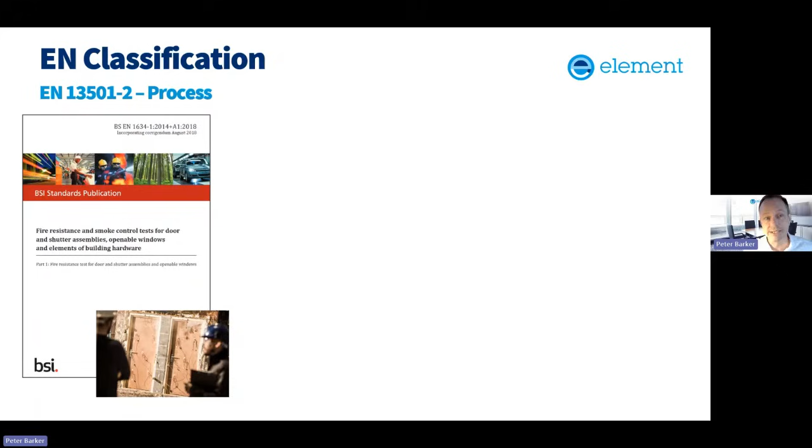Okay, so on with the EN classification process. In a nutshell, it's actually relatively straightforward. You have your test standards, the standards against which you evaluate the performance of the product in test conditions. You then move forward and take that test evidence and extend the scope of it - that's done under EXAP standards or DIAP rules within test standards, but it's the process of extending the scope. And then you communicate the performance of the product, depending on the performance characteristics you want to communicate based on the test evidence, by following the requirements of the relevant classification standard. For fire-resisting doors, that's within EN 13501 Part 2.

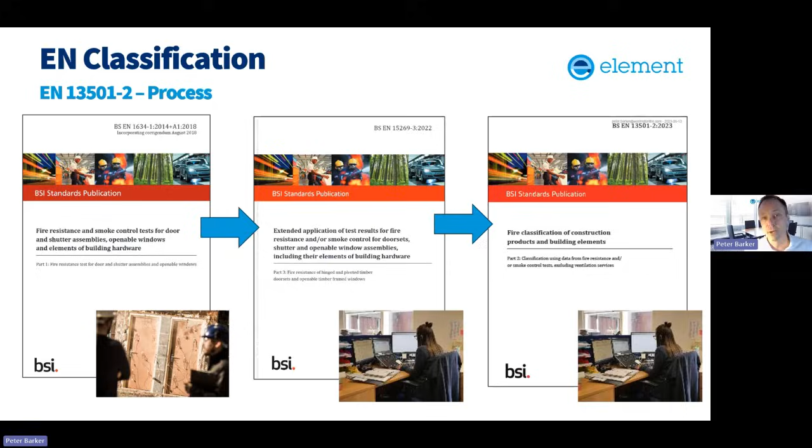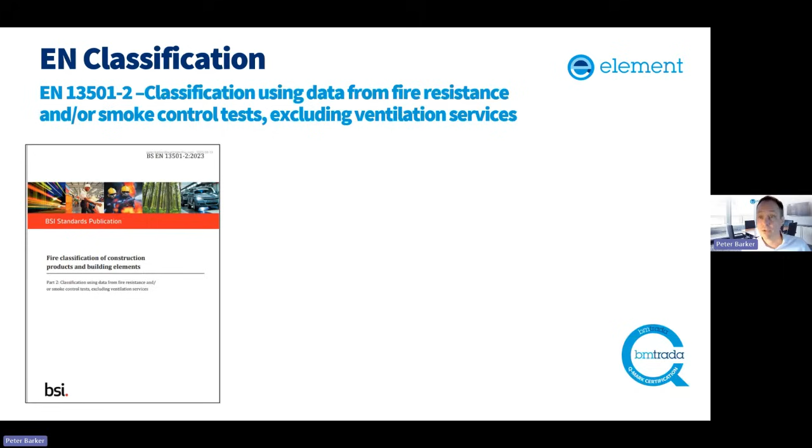So when we look at the classification standard itself, the classification standard relevant to doorsets is 13501-2. Within the standard, it explains what is meant by integrity as it relates to the classification letter, which happens to be E for integrity, and breaks down what that means. But it also goes through the other performance characteristics relevant to the products covered by that 13501-2 standard relating to fire-resistant construction products: E for integrity, I for insulation, W for radiation, R for load bearing, and so on and so forth.

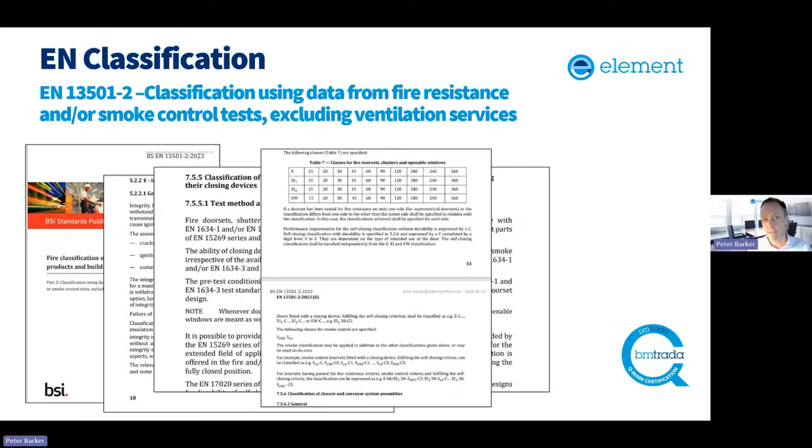Within there as well, there's a number of sections that relate to different types of products, and the one that relates to doorsets, shutter assemblies and openable windows is section 7.5.5, and that tells you the test methods, the field of application rules that you need to use when drawing together the evidence that would allow you to apply a classification to that particular construction product. It also gives information on how to present that classification in terms of the string of letters and numbers and what they mean, and we can explore that a little bit later.

And then in the annex, it gives you a format, a template as to what a classification report should contain: information on the sponsor, who prepared it, a description of the product in sufficient detail that someone can see that the classification report relates to the product in front of them, and a summary of the evidence that's been used to pull that classification report together.

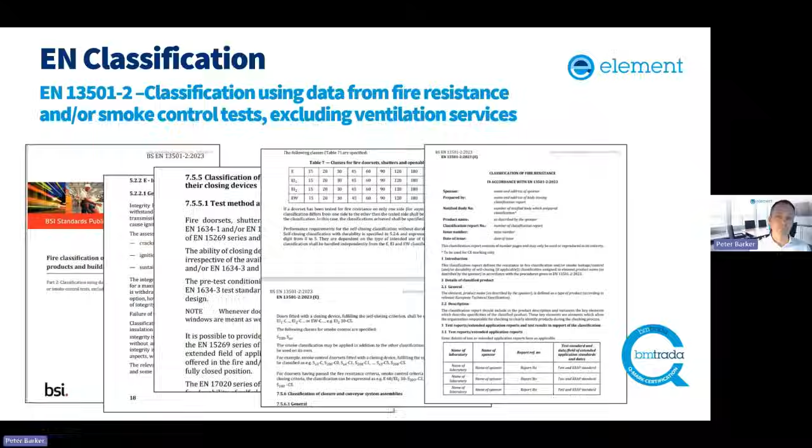So, starting at the beginning of our journey in terms of how do we go about generating a classification, it is about starting with a product family.

This is a definition from 15269-1, and this breaks things down for a product family into three parts. Reading out the definition: a product family is a group of products within defined limits of variability of the product parameters, derived from at least one representative product that has been successfully tested.

And you can think of this as the design. The next part, the limits of variability, are defined by the manufacturer or a technical specification and are determined by the allowable changes in composition, materials and construction given by the applicable EXAP rules or relevant supporting tests. This is effectively the scope of the product family.

And then finally, for all product family members, the fire resistance and/or smoke control performance has to be equal to or better than the lowest common classification that the manufacturer wishes to declare, and this is the performance. So conceptually, think of this definition of product family as the wish list.

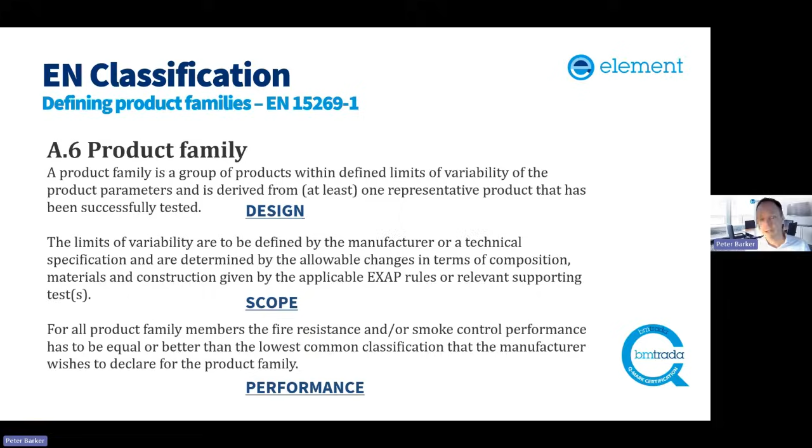I've taken the time to break this down further and relate it to something you'll certainly be familiar with: the current products you manufacture against the assessments that support those scopes within the national schemes.

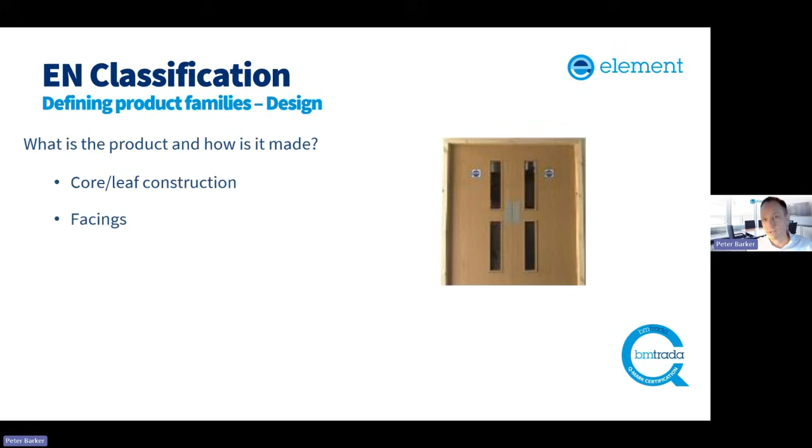So if we start with design, when looking at product family, the first question you want to be asking is, well, what is the product and how is it made? Breaking it down: what is the core? What is the leaf construction? What are the leaves made of? What facings do you apply to the door?

What are the glue lines? What apertures do you want in the door? Do they come with aperture liners? How do you go about glazing the door? What door frame? Typically, how do you construct your door frame? What materials and so on? And the seals that you'll need to fit to the door based on the performance characteristics you want to claim.

Now, I appreciate when you look at this you think, well that's all well and good, but I want alternative facings, alternative glue lines, different numbers of apertures and shapes and door frames and seals and all the rest of it. That's fine, but that part's in the scope.

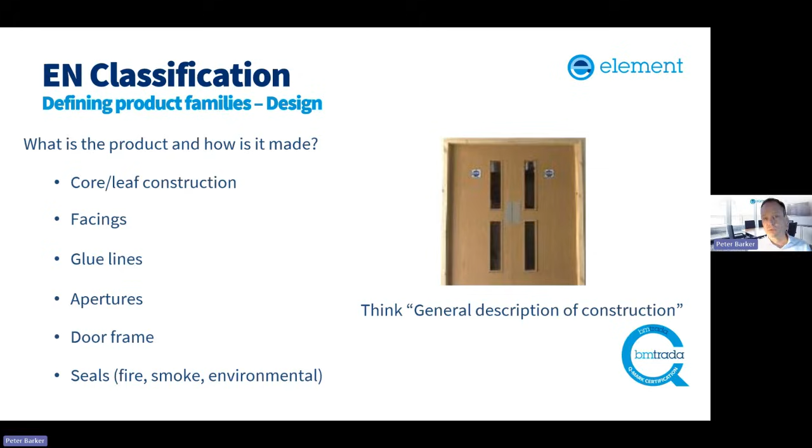Initially, you want to be thinking of this as your general description of construction. That's a section within the field of applications you'll be familiar with today. It's the description of the product in terms of what you construct, and then we can start digging into the next part, which is the scope of the options you want to provide. So that's the first part - what is the product, what is the design of that product?

Then we look at the scope. This is where you start looking at the design options you make. So now you're looking at things like dimensions - not just smaller, bigger, but there will also be things in terms of size alteration.

So do you need to provide for adjustment to lippings, for example, for on-site fitting? Or does the design of the door have internal framework to adjust the size of the door as part of the manufacturing process? You're looking to have the option for reducing that framework or removing it altogether.

Configurations - singles, doubles, but also things like over and side panels, fan lights, side lights, or solid infill panels. Also what hardware you would like to fit to the door - options for hinges, lock sets, closers, access hardware, air transfer grills, whatever hardware you want to provide for that particular product design.

Glass as well - type, number of apertures, alternatives in terms of glazing systems and shapes and so on. Facings and finishes, decorative finishes, and other faces you might want to offer to the door, and perhaps alternative seals. And there will be other things missing off this list where there'll be additional scope requirements as well.

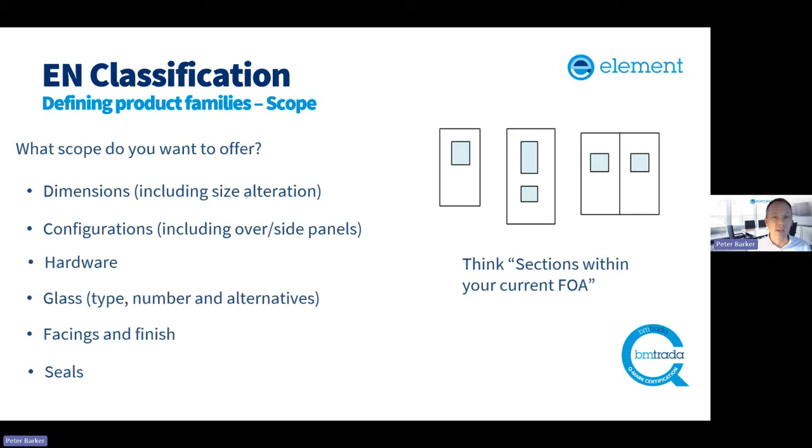Now, the best way of thinking of this part - all of you will be familiar with the field of applications - think of the sections within your current field of application. Indeed, that's how we've laid out our XAPs. It should feel familiar. So if you're looking at those different sections that currently handle the glass, the hardware, the facings, the finishes, and the seals, you can begin to understand what that scope is.

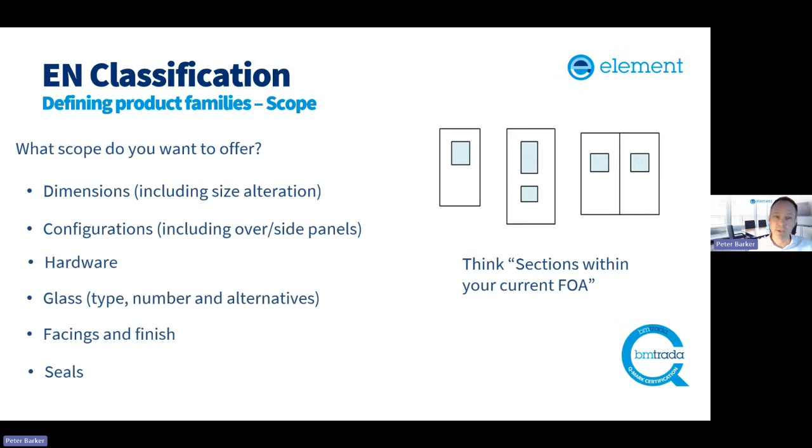And clearly, the more scope you want to offer, the bigger the test program will be. But that's the same situation as now. There are some things we need to think about within the XAP framework to avoid, to make sure an efficient amount of testing is conducted, and I'll explain that shortly. So scope, really, you've got an existing framework - you can almost tick things off if you look at the sections within your current field of application.

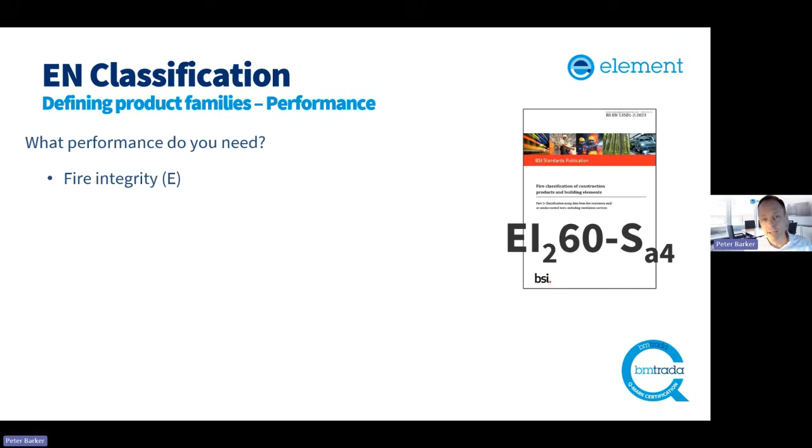Then we're looking at performance, and this is a very important part of defining the product family. This is the performance that you need. So we're looking at: do you need integrity? Do you need thermal insulation as well, or insulation performance? Do you need smoke control - we've got SA3 or SA4. Do you need radiation control? Do you need self-closing, and do you need durability of self-closing?

Now, in the vast majority of cases, in terms of the performance characteristics and classifications we look for in the guidance to the building regulations, you're looking at fire and smoke. Sometimes there are requirements for insulation, but typically most are called up as integrity and smoke control. But the classification system does cover the other characteristics that are on the screen, and we have brought them inside the third-party certification schemes for EN.

So in this case, you've got to think end-use requirements. Now why is this important? You could think, well, I'll go for full integrity, insulation and smoke control, but unless you need to provide certain designs with full insulation, it's worth thinking, because that is going to start dictating the product family in terms of maintaining that insulation performance. For example, the glass will be of a particular specification to provide that full insulation you may require. So it's worth thinking about those end-use requirements and what characteristics you definitely need from a particular range of products, rather than thinking, well, if I set out for everything, then I can trim it back accordingly - because you may well end up with a specification of door that always requires fully insulated glass when it comes to glazed apertures.

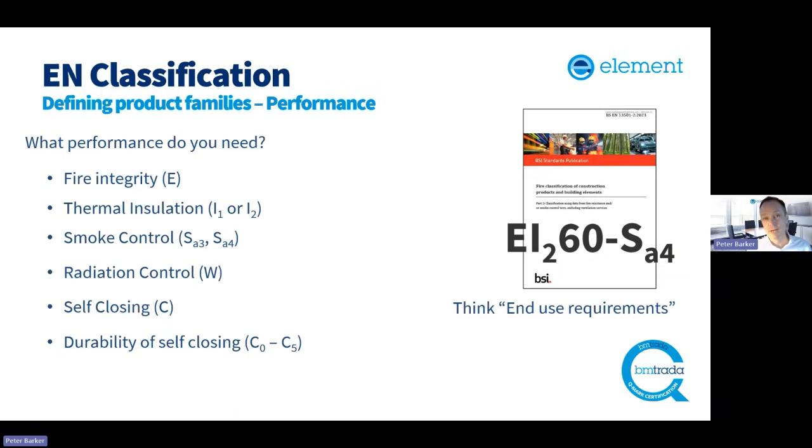So all of the above, as I've said, have been included in the new QMark schemes. Thinking about that performance and how that's going to shape your product family going forwards is very important.

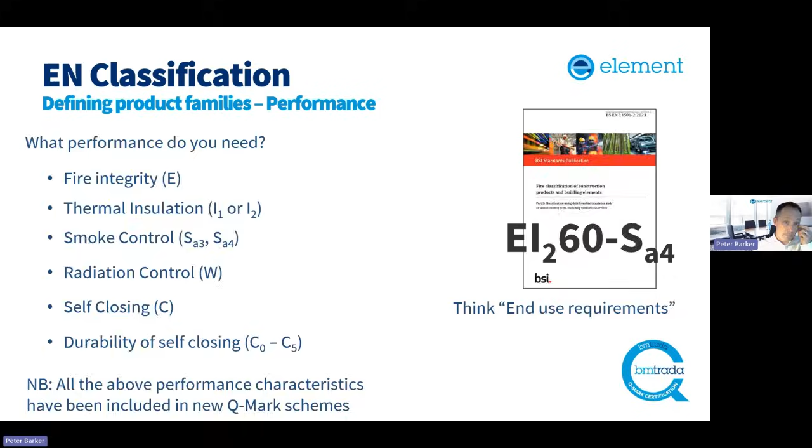So if we get under that and have a look at the test program considerations, we have EN 15725, and that's the header standard for XAPs. That doesn't tell you specific rules on XAPs. This is the governing document that tells you what goes into an XAP, what the approach to XAP is, and it also includes a section now on how to prepare XAP standards.

So there are two approaches within EN 15725. All start with the definition of the product family in the way that I've described - so design, scope of that design, and what is that performance you're setting out to achieve. Just to reiterate on that performance piece, a number of characteristics under our national approach - for example, with insulation, it's been possible to get to that insulation performance by fitting a different piece of glass that can perform, and marrying it with what you know of the doorset performance also being an insulating core.

Likewise with smoke, it's been possible to cascade previously tested smoke seals that have been tested to the relevant standard and claim smoke performance. It's not to say there's anything wrong with that system, but the way the European classification system works, it looks at all of these characteristics from a doorset-led perspective. So it's not a case of just backfilling things based on evidence generated on other designs. It looks at the design, the performance characteristics you want from that design, and does it from a doorset-led approach for those characteristics for that design.

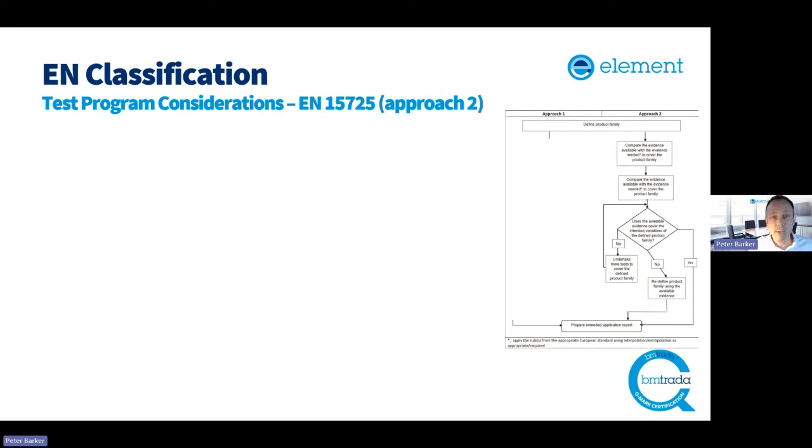Approach 2, very similar, but this is recognizing that you still need a product family, but you may already have evidence. That evidence would be submitted to the laboratory that's going to prepare the XAP and classification report for the product family that's being requested. Effectively, you're going straight in to check whether the results and that evidence do in fact cover the manufacturer's product family. If it doesn't, in a similar way to what we described before, you either redefine the product family or you undertake further tests to fill those gaps that you need.

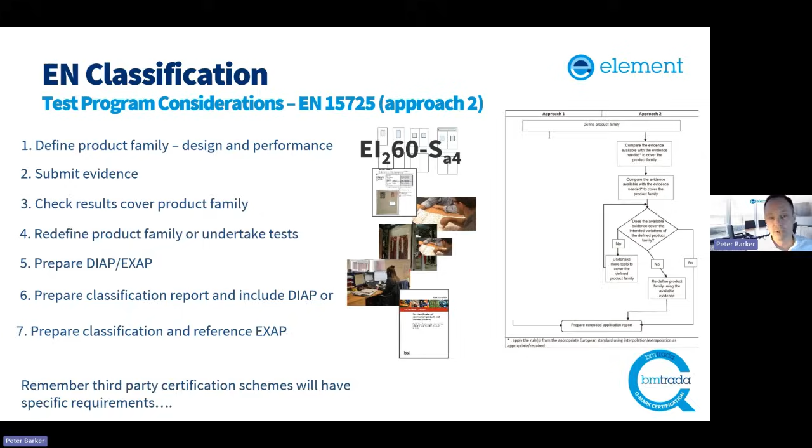Ultimately, when you're happy with the scope redefined or you filled the gap with additional testing, you prepare the scope documents and you prepare the classification report that includes the direct application, or you prepare a classification report that refers to the separate XAP that's been prepared. And again, no different, remember that third-party certification schemes will have specific requirements, and we'll talk to that later.

So I've done a slightly different arrangement for those of you that have seen me explain the concept of product families and so on before. Others I know won't have, but I thought I'd use these slides against existing XAP rules to show you the importance of getting that scope right against the performance characteristics that you want to provide.

Okay, so we have a fairly basic looking double door here. We have a product reference for it, and it's the ENDoor. And in this instance, the manufacturer, it's timber based. They want integrity and insulation for 60 minutes. And so we know that we're looking at the extended application rules within EN 15269 Part 3.

The design, it's a particle board design, could be anything, just pick that. It's lipped, it's got glazed aperture liners in it. It's glazed, it's in a softwood door frame, unlikely for 60 minutes to be fair. But it's got a timber door frame, 2mm timber veneer finish, and it has fire seals. It has intumescent seals around the perimeter. Obviously there will be hardware in there and other features, but in its basic design, its general description is there.

So what I've done is look at a very basic set of requirements. I know most scopes will run wider than this, but if we just start with dimensions, typically most people want the option of making things smaller than what was tested. And when we look at the EXAP rules within 15269-3, it points at the DIAP rules in EN 1634-1, that rule in the EXAP standards A31, and it permits you to make it smaller. Fine, tick. So that's the first scope requirement ticked off, and we can do that.

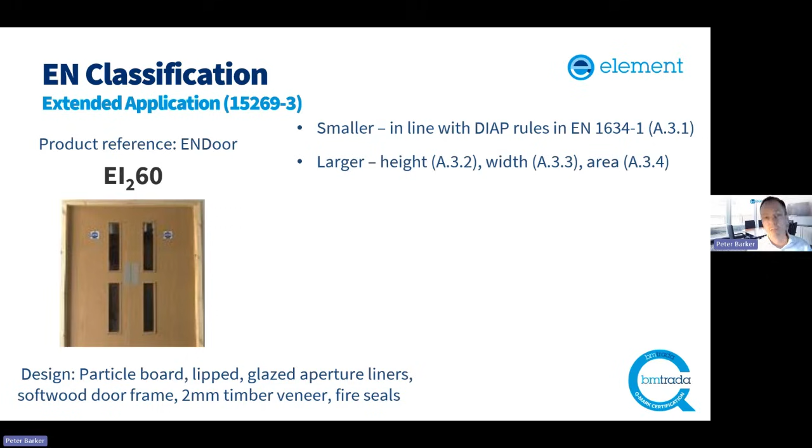So we know, based on testing this design, we've got the scope for making things smaller and larger. There was also a request for adding veneers and removing tested veneers, and actually that is possible. There is a set of rules for that, A51 and A52.

A request also for lipping thickness increase and decrease to provide different options for lipping thickness, but also quite often there's a requirement for some scope for site fitting allowance to just allow for some lipping adjustment. That is possible in fire, but there are limitations to the increase and decrease of lipping thickness, and that is given in A515. And an option to remove apertures.

Having a door without any glazing in it, but also to reduce the number of apertures from 2 per leaf to 1 per leaf, or 2 in one leaf and none in the other. And there's a rule for that as well.

Now, there are conditions around each of these rules. For example, removing apertures would need the glass tested to be less than a certain percentage of the leaf size, because of the stability that glass can offer to timber-based leaves. The same with the reduction in the number of apertures. But given what we've got in front of us, it's possible.

So straight away, with a request with some information on the design, the goal for performance characteristics, and some requests for scope, we can work our way through the EXAP, and with one test we can get these options covered off, pending a successful test.

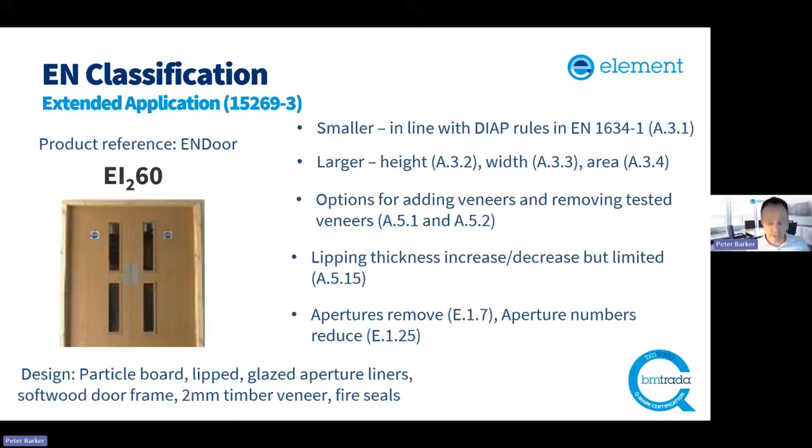When things start getting interesting, and this is why you need to understand from the off if you're looking at fire only or fire and smoke, same design. This time, though, we're looking for integrity, insulation, and smoke control.

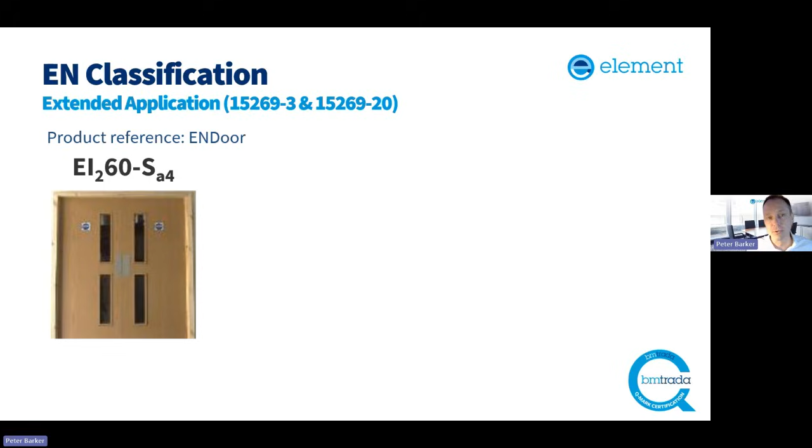The SA4 relates to ambient smoke control, where the door has been tested without a tape at the bottom of the door. So it has some form of seal at the bottom of the door that allows it to provide the required level of ambient smoke control.

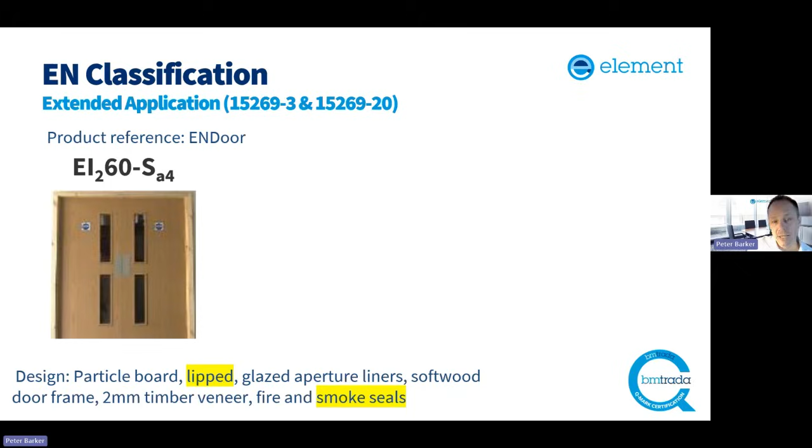So the design, there is the same design, but obviously now we are looking that there would be some smoke seals included, and there'll be a reason. I'll explain the reason for highlighting some bits.

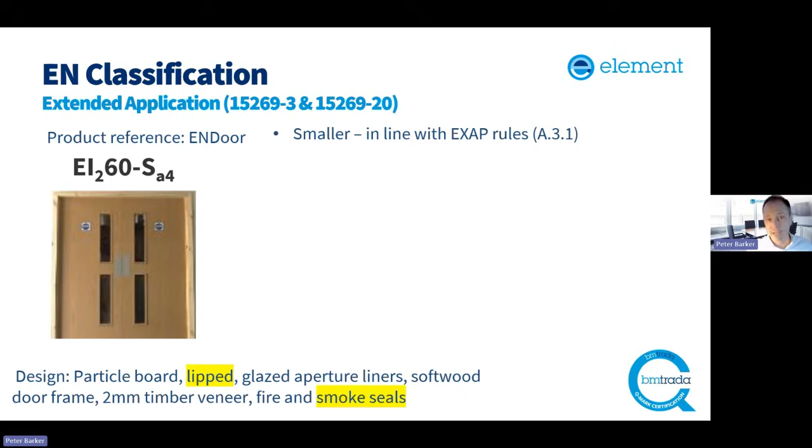So same request, we want to make it smaller. It's the fire and smoke door. We still want to make it smaller. Now, looking in the EXAP rules within 15269-20, you can make it smaller, and that aligns with the rules that allow you to make it smaller according to Part 3 for fire.

So smaller, ticked. Starts getting interesting with larger now, because under 15269-20 you can only make a leaf larger if you've tested the doorset at 2500mm high, and area 6 meters squared in the case of a double door. There are specific rules around height, width, and area, but now we have a conflict between the fire scope and the smoke scope.

So if you were to test the fire door at 2200 high, and test the same design smoke door at 2200 high, you would be limited at 2200 high or smaller. So straight away, if you're not balancing both XAP standards against that performance requirement, you may end up with something that limits a particular design scope option.

Options for adding veneers and removing tested veneers is possible within 15269-20, as it is in Part 3. And there is also the potential for adjusting lipping thickness, but the way in which the rule is handled, and the reason why you have different ways in which the rules are handled, is because you're looking for different characteristics.

It's limited to the sealing system on the smoke door, whereas it's a limited amount by plus or minus 25% of the tested thickness for fire. So again, if you're not careful and make sure that you've got your required lipping thicknesses tested for fire, you can end up testing something that doesn't give you the lipping range that you actually want when it comes to fire and smoke.

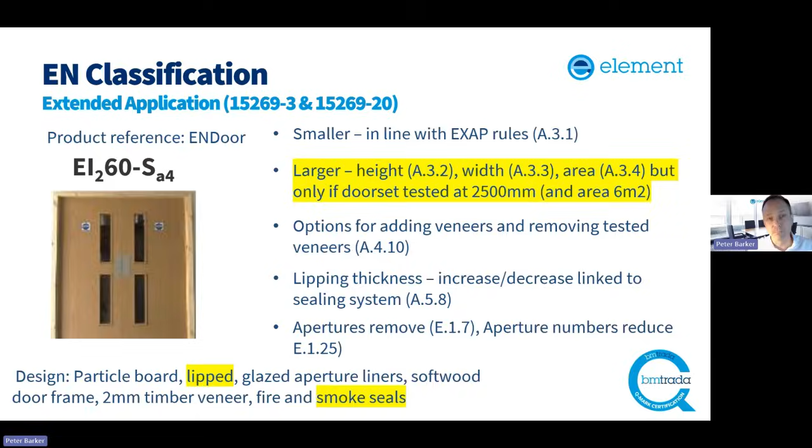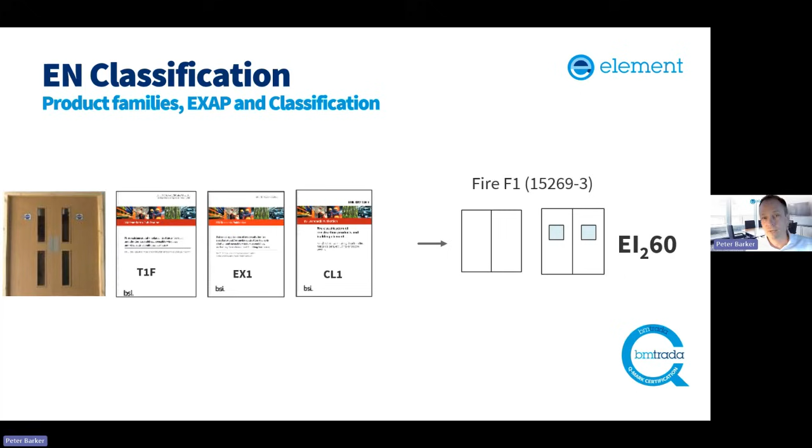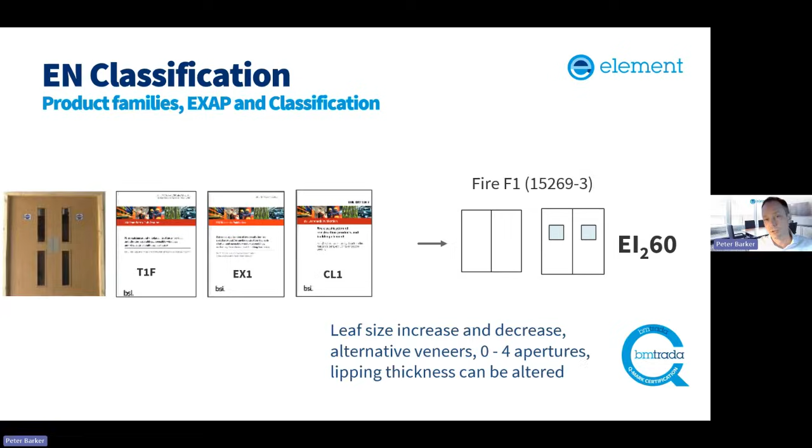We have a door, we have a fire test, we have the first EXAP classification report, and you get the classification that you want. You've got your family, where you've only used 15269-3, and you've got your leaf size increase and decrease, alternative veneers and decorative facings, 0 to 4 apertures, and your lipping thickness that can be altered. With smoke, you're now balancing a fire and smoke test.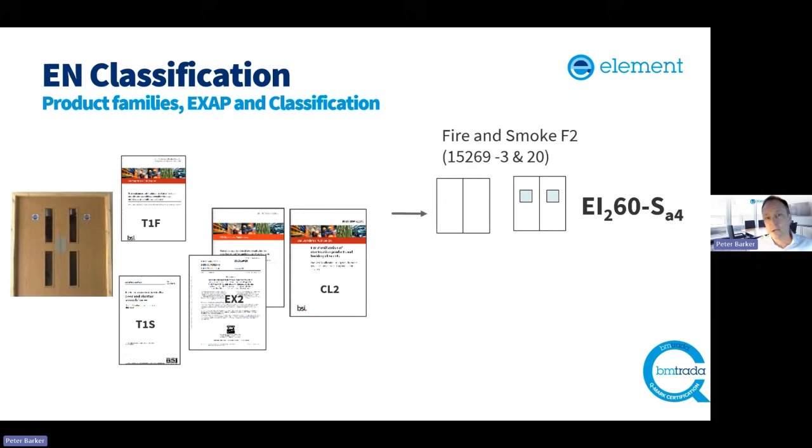You need to use those EXAP standards in tandem to make sure that when it comes to the classification of these designs for EI2 60-Sa4, family 2, you've got your leaf size increase, decrease, alternative veneers and apertures and lipping thickness, but you needed to make sure you've done the right leaf height for the smoke test, and checked the lipping thickness for both.

That you made sure your smoke seals were included in the fire test. I've done different versions of these slides, and it's still something that's not widely understood, but hopefully that's another way of presenting the importance of families against the performance classifications you need at the end.

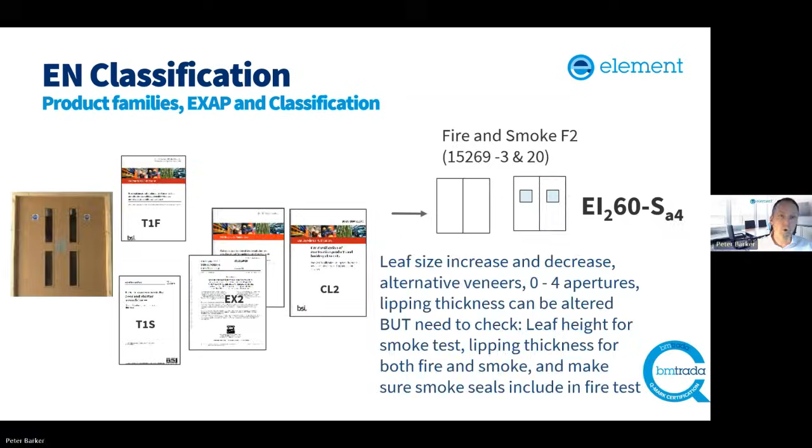Okay, so how does this get presented? You can then start seeing the Doorset design, based on those family references for those particular performance characteristics and the evidence that supports that, and the EXAP scope, you get your details of the classified product and families.

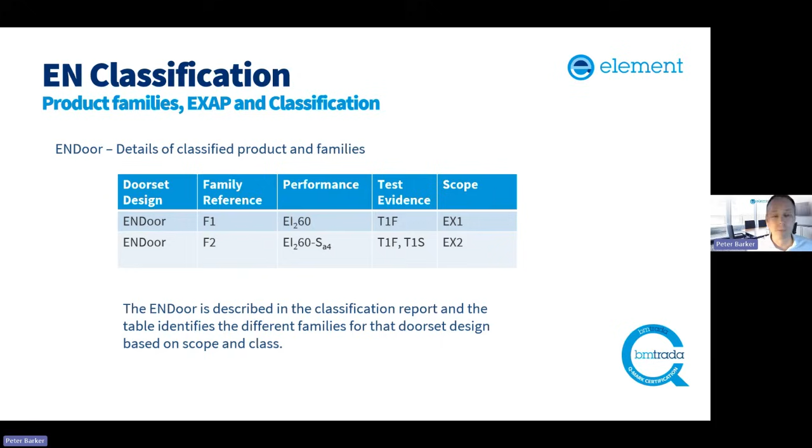That design will be described in the classification report, as I've already mentioned, and there'll be a table in there that will identify the different families for that Doorset design based on scope and class, so you know what relates to what and what scope is given for those particular designs.

The classification itself will contain this as a communication of the classification, and there is a statement that will now be included going forwards. This is a request from UKAS that it's made very clear within the classification reports that the classification document does not represent type approval or certification of the product.

The statement is in there to make clear what the classification is communicating. It's that codified common technical language that communicates the integrity, insulation and smoke control as appropriate, because quite often we're hearing classification reports being waved around as if they are certificates. They're not. They're the conclusion of a process that communicates the performance of the door according to those classes.

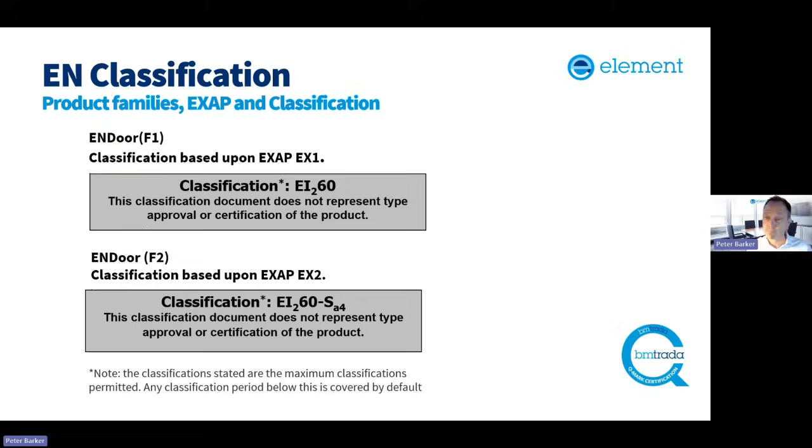Okay, so that's part 1 done in terms of EN classification, and hopefully just a bit more information and detail on how to break down those product families and relate them to the EXAP rules.

In summary, we are heading towards EN standards. Certainly England's Approved Document B, with BS 476 being replaced by EN standards. There will be a requirement, we're already seeing it, to specify EN classification, and it'll be driven by those building regulation requirements in the guidance.

So the EN classification system, particularly in relation to doors, has historically been bound up with the CPR. The fact that we've not had a product standard for internal door sets has meant that in many cases 476 has been the default standard. By bringing it into the building regulation requirements, irrespective of whether we have a product standard for it, EN classification is going to be driven for all door types.

EN classification is a defined process of testing, extension, and classification using the standards that I've talked about. So that's what we will look to bring inside the certification schemes, which I'll talk about shortly. Defining product families helps the classification process, but try and think of it more like a wish list and get some familiarity around some of the things that you already have undertaken in your existing scopes and field of applications over the years under our national system.

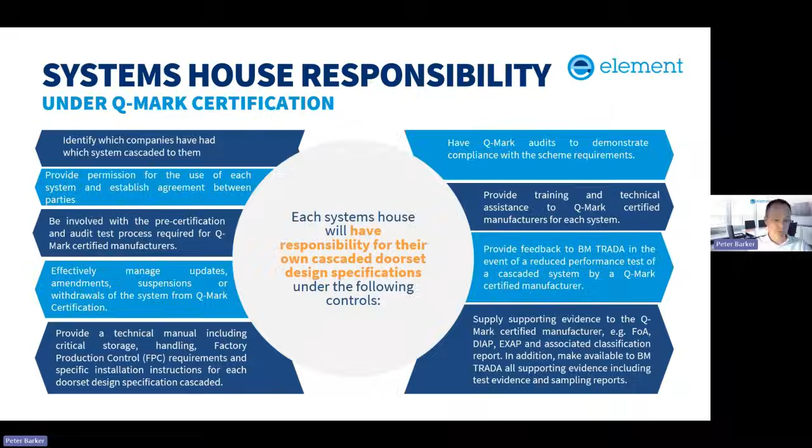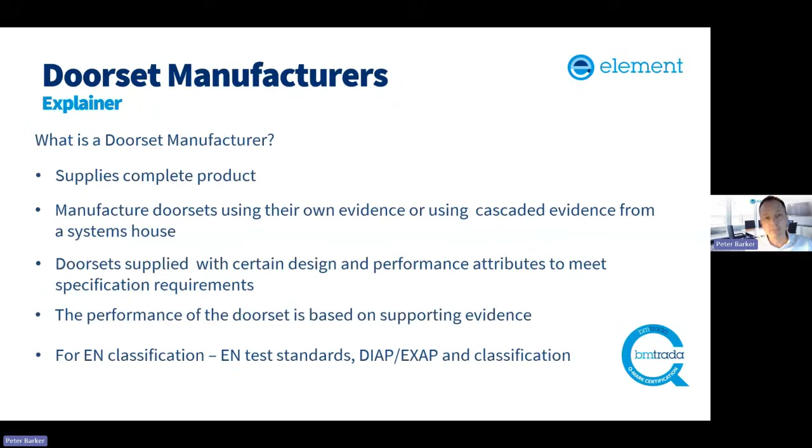So what is a doorset manufacturer? We've got a supply of complete product in this case - manufacturing door sets using their own evidence or cascaded evidence from a systems house, supplied with certain design and performance attributes to meet specification requirements. The performance of the door set is based on supporting evidence, and for EN classification, this will be EN test standards, DIAP, EXAP, and classification.

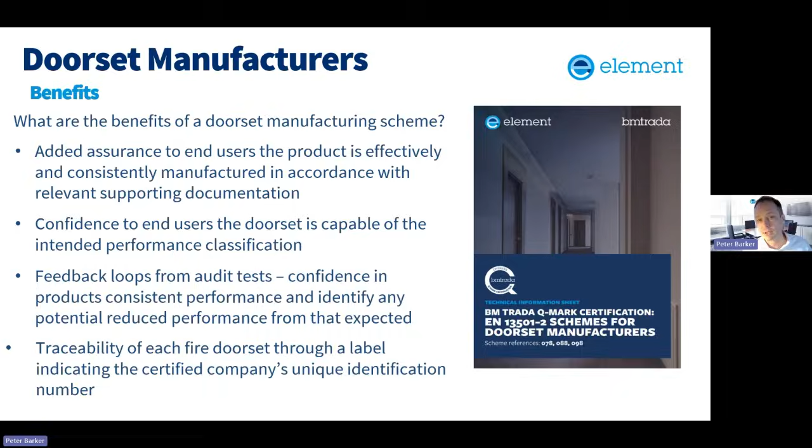So the benefits of a door set manufacturing scheme: added assurance to end users that it's effectively and consistently manufactured in accordance with relevant supporting documentation, giving confidence to end users that it's capable of the intended performance classification. The feedback loops give confidence in consistent performance and identify any potential reduced performance from that expected, plus traceability of the fire door sets through labels indicating the certified company's unique identification number.

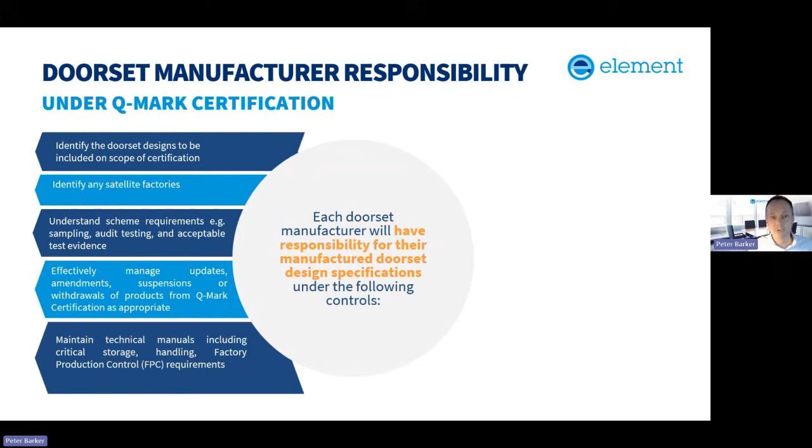Understanding the scheme requirements related to sampling, audit testing, and test evidence, effectively managing updates, amendments, and suspensions. Maintaining technical manuals with storage, handling, and FPC requirements, having QMark audits to demonstrate compliance, maintaining and providing installation instructions, providing feedback to BM TRADA - very similar a set of responsibilities to the systems houses.

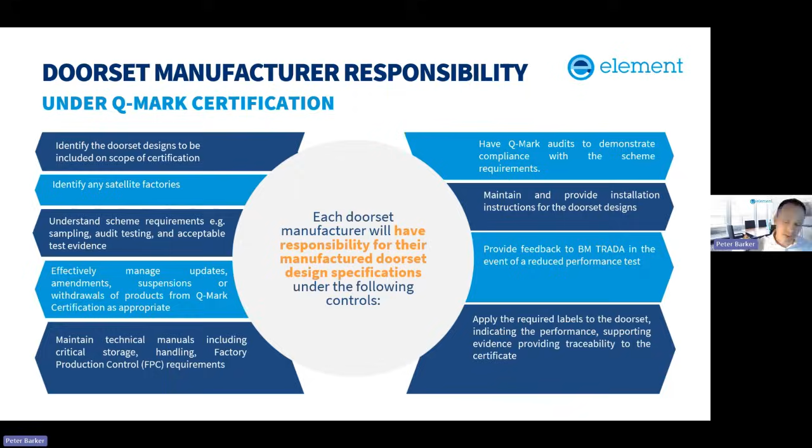So the application process - in summary, we understand the systems house scheme, the Doorset scheme, the importance and the roles and responsibilities that they play. What is the process for joining the scheme?

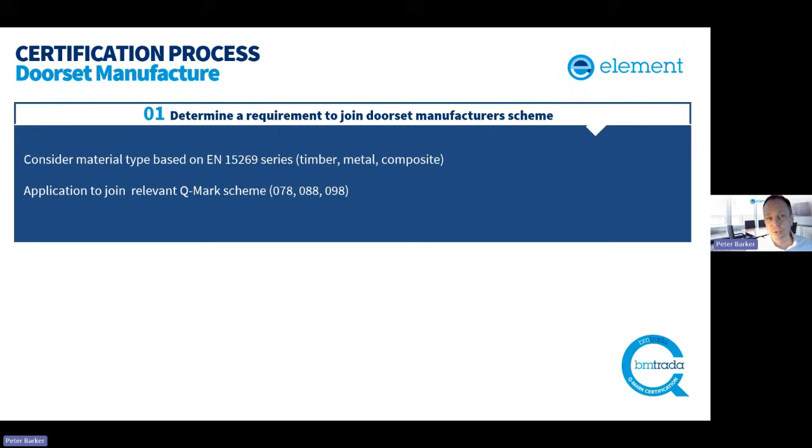First of all, there's a determination of a requirement to join this manufacturer scheme. So you'll be looking at the materials, whether timber, metal or composite, and then an application to join the relevant scheme, depending on what you manufacture. There's the application form, and an application to join the QMark Doorset manufacturer scheme goes in.

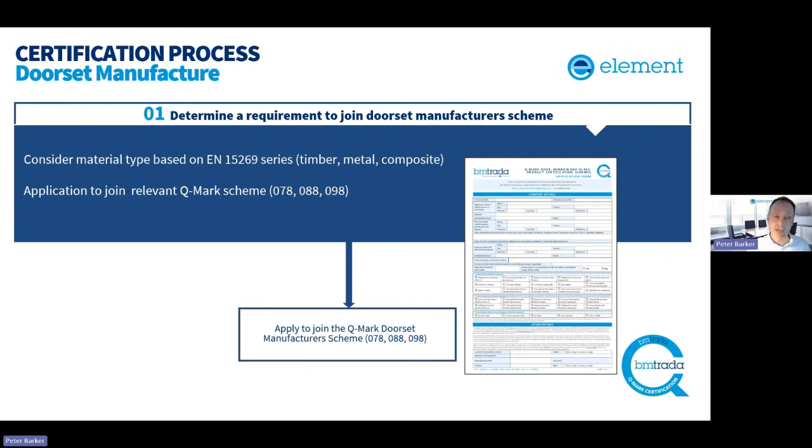I'll talk through this process and mention where systems houses feature as we go along the way. There is a separate application process for systems houses. I'm going to walk through Doorsets and just show how the systems house links.

We then get onto the evidence for the purpose of certification. Obviously underpinning the certification is the evidence, and we've talked about the EN classification system, but the evidence would be there if it was under the national system as well, as everyone on the call knows.

So do you have evidence? If you don't, then there'll be a job of collating that evidence for review by BM TRADA, and that collation could be your own evidence or it could be evidence cascaded by systems houses. If it is system house evidence that you're relying on, then effectively, if it's under the QMark systems house scheme, that evidence would be effectively pre-ratified as being acceptable and can move forwards.

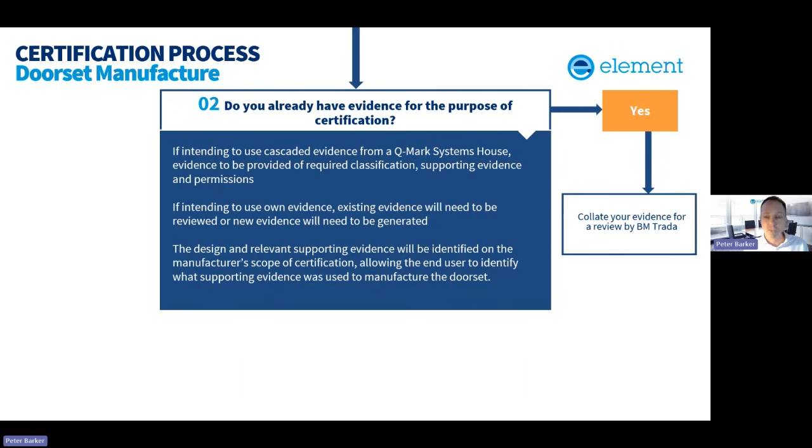If it's your own evidence that you already have, it would need to be reviewed. Or if you don't have any evidence, then you need to generate some, and that will be conducting an appropriate test program - and we've walked through what's required there with the EN classification system.

Ultimately, that review will determine that the evidence meets the scheme requirements. And it's at this point, if it doesn't, you would need to go back through and conduct further testing. So it's very important as part of generating the evidence is understanding what the scheme requirements are.

And it's at this point, I will hand you over to my colleague, Nick Whitelock, to talk through the acceptable forms of evidence under our certification schemes. Nick, if you want to take it from here, thank you.

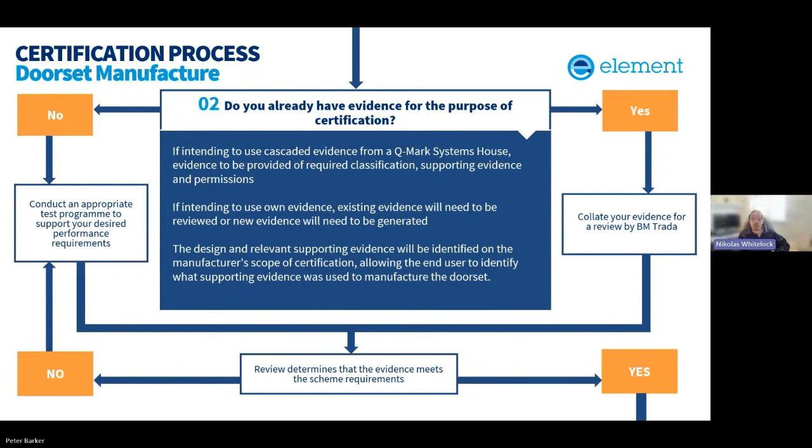Good morning, just about, and thank you, Peter. My name's Nikolas Whitelock, I go by Nick, Technical Manager of Doors and Smoke Control. So I'm going to be exploring the criteria for supporting evidence with you. Much of this is going to sound very familiar.

And firstly, we're going to jump straight into sampling. So if I could have the next slide, please, Peter.

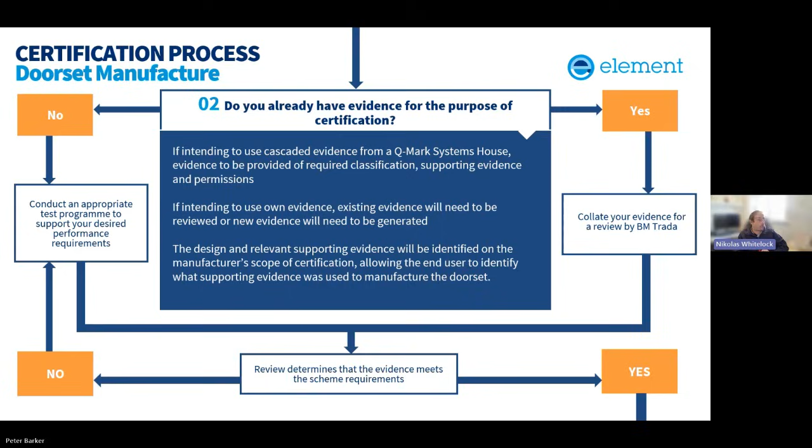Thank you very much. So sampling, as many of us will know, provides evidence of what the product was originally tested. So in most cases, it will get the information of what the test specimen is prior to the actual test being undertaken. And in some cases, it's virtually impossible to tell what that information is at the time of the test being undertaken.

It offers additional reassurance to the ongoing production as things move on from the original test. This information can then be audited and verified against the original testing. And for all of our schemes, all sampling reports must follow the principles of the group and notified bodies papers, any relevant rules or checklists, and they must be in English.

So you'll note that there are multiple schemes that have been talked about today. They will have relevant checklists for each of them. Sampling for our schemes must also be undertaken by an approved representative of BM TRADA.

We may accept sampling from other bodies, however this would be subject to approval. We'd need to know who's undertaken it, the quality of the sampling report - is it in English? Does it capture enough information for us to verify what was originally tested and whether it's representative against the test evidence?

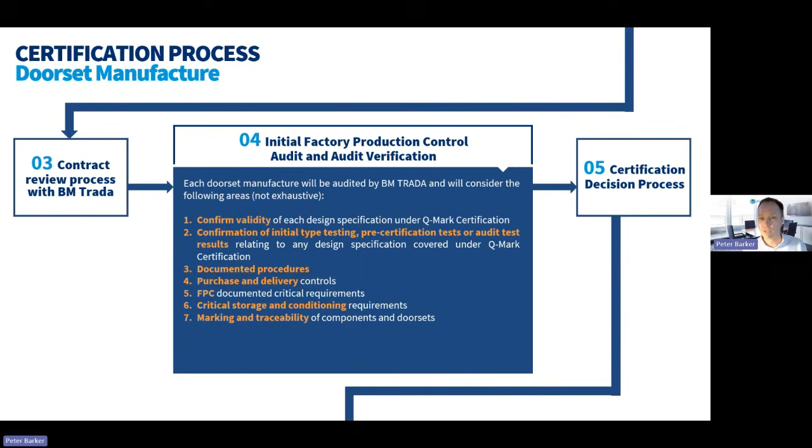At that point, pending the decision, a draft certificate can be sent to the client, and on confirmation of those details, a certificate is issued with its status made publicly available online, and the certified company can start making the products.

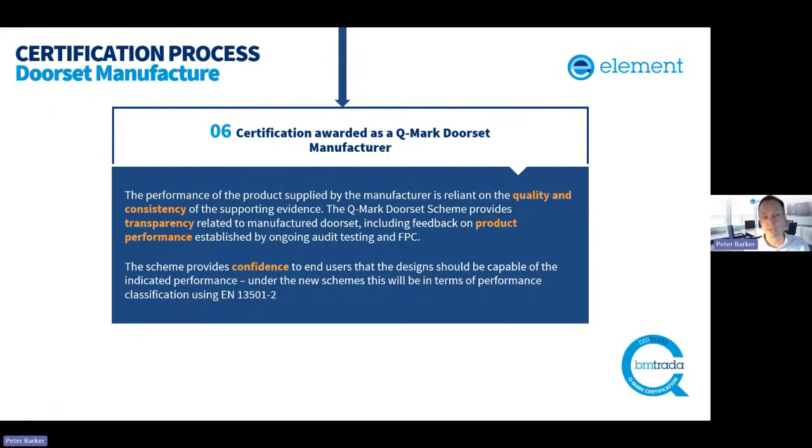So certification is awarded, confirming that the performance of the product has been established, by ongoing audit testing and FPC, providing confidence to end users that the designs should be capable of the indicated performance. In the case of evidence brought into these schemes, that will be in terms of performance classification using EN 13501 Part 2.

So that's taken you through the process of application and some of the things to expect along the certification journey, including an overview of the supporting evidence and requirements that sit within our scheme. Just a very quick run through the certification process as an ongoing process.

So you've got the definition of the certified product, the scope of the product, which we've covered, the sampling of that product as a part of the certification process, the testing that takes place, and the evidence that's prepared. For those that rely on a systems house, that activity is done by the systems houses. For those of you that generate your own evidence, that would be something you'd be responsible for.

We've just looked at the aspects of factory production control, and then following that with the certificate issue that allows the manufacturers to make the products. We also, within certification, it's an ongoing process.

So we have a feedback loop of validation and verification, done by ongoing FPC surveillance, factory production control, periodic audit testing, including sampling under the manufacturing schemes. That then allows the ongoing marking and labeling of a product as a certified product.

And within the certification process, we'll also be looking to make sure that we maintain our schemes in line with any changes in response to regulatory requirements, or the manufacturer will also have an obligation to inform of any changes that may affect their certification as well, whether that's a change in manufacturing processes and so on and so forth.